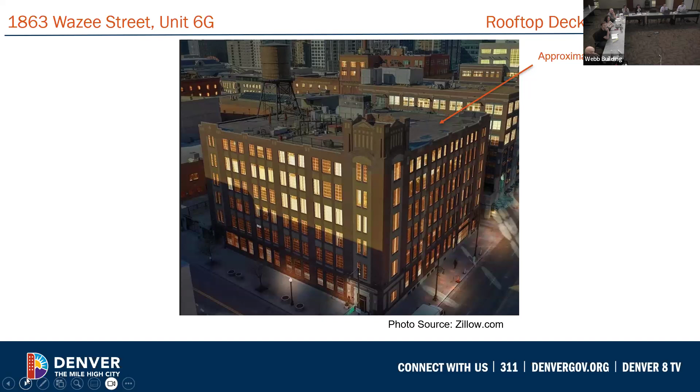Next slide, please. So here's on the left, a floor plan of the unit. And you can see the stair being added, and its location is driven in part by a kitchen island. The image on the right is the roof plan showing that staircase reaching the roof.

The setback from 19th Street is 12 feet 9 inches. There's a guideline that says that the setback should be 15 feet, so they're not quite there. But again, the interior layout of the condominium is driving that location, and the more that they move the bulkhead inboard, the more it bisects the usability of their outdoor space. So there's a couple of reasons they've designed it the way they have.

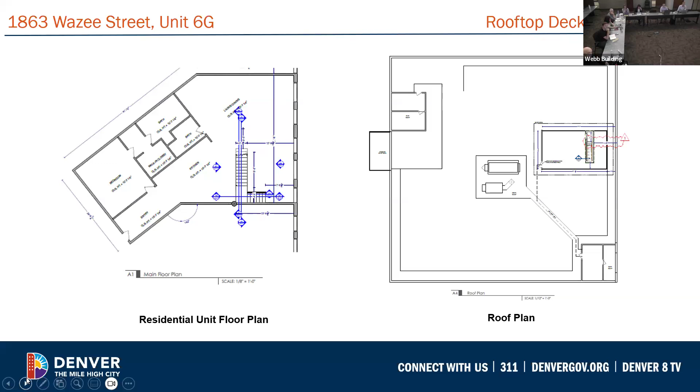Next image, please. Elevations here from 19th Street and the alley. You can see that the bulkhead is designed to run with the stair, so it's as limited in height and form as possible. It reaches a maximum height of 8'9½", which again mitigates staff's concern that they're not meeting that full 15-foot setback that's suggested in the guidelines.

As you look from the alley, it's only as wide, of course, as required for the stair function. There are a couple of other elements that are part of the project.

There's going to be composite decking set on the roof surface just to create a usable space for them. A 3'6" tall railing will surround 3 sides of the outdoor space. You can see in the alley elevation, there's a screen wall to give some privacy to the unit. It's on the sort of inboard southwestern side of the space. It is to be clad in cedar, and it has a full light door that would allow the users to walk onto the rest of the roof surface.

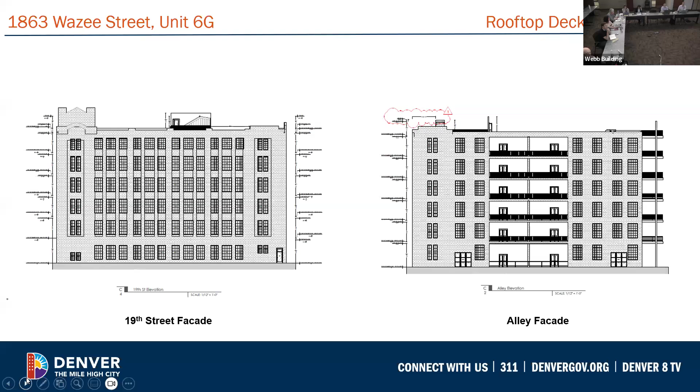Next slide, please. The bulkhead is to have a standing seam metal roof and either metal siding or composite siding, to be determined. The only fenestration, which you see in this south elevation, faces inboard on the deck, so it won't have a glow that will affect or be visible to other people on the street or adjacent properties. There's no outdoor lighting indicated on the plan that may be required by code, and if so, we'll need to see that light fixture and it will have to be downward oriented to meet lighting code.

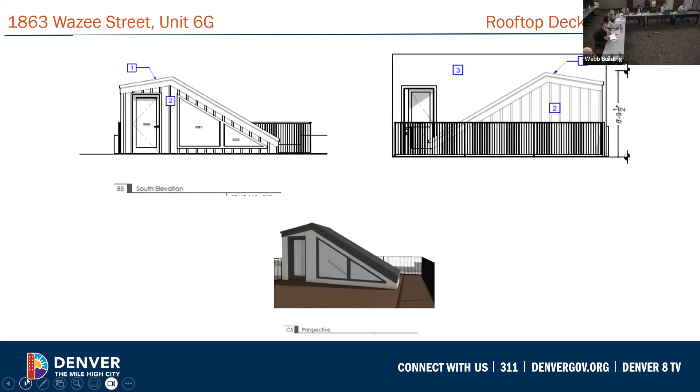Next slide, please. We are recommending approval as designed with one condition because there's some discussion happening still about the exact material selection. We want to make sure that everything has a matte finish. And that's it. Great. Thank you, Amy.

Do any commissioners have any questions for staff this morning?

I have a question. When we speak about a matte finish, does that include, would a galvanized metal be matte? And does that also apply to the standing seam roof? The way it's worded in the condition is a matte, non-reflective finish. I don't think staff would perceive a galvanized finish as meeting that criteria. And if you think we need to add some more clarification, we can. I don't think that's even being contemplated. There is a painted metal standing seam material indicated in the packet. I believe that's the direction that they're going. They haven't said anything to suggest they have other ideas for the materiality.

Any further questions for staff? Okay, not seeing any. Thank you, Amy.

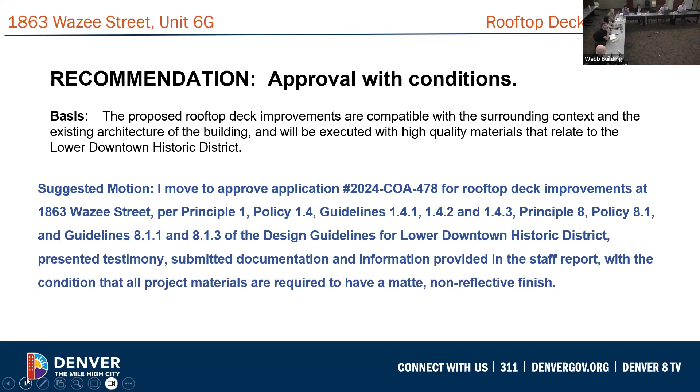Thank you. And we do have the applicants here and their designer, I believe, is on the Zoom call, Kyle. Wonderful. So open it up to the applicant presentation. As soon as we get it started here, if you could just begin with your name and address for the record, please. And then Kyle Taylor's moving you to a panelist, so you'll be able to speak shortly.

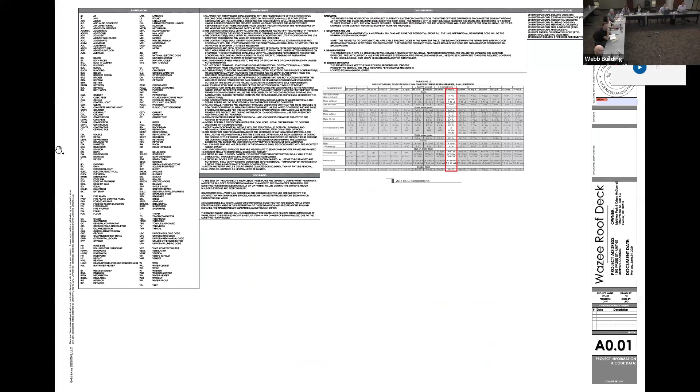Good morning, I'm Chrissy McConnell. Matthew Park. We're the owners of 1863 Wazee 6G. No additional information, other than what Amy had presented, but would love to understand if you have any additional questions. The only other thing was, there are two roof decks that currently exist there. One has a structure with an exit very similar to ours, that is not necessarily 15 feet from the street as well, so just stating that for precedent. Thank you.

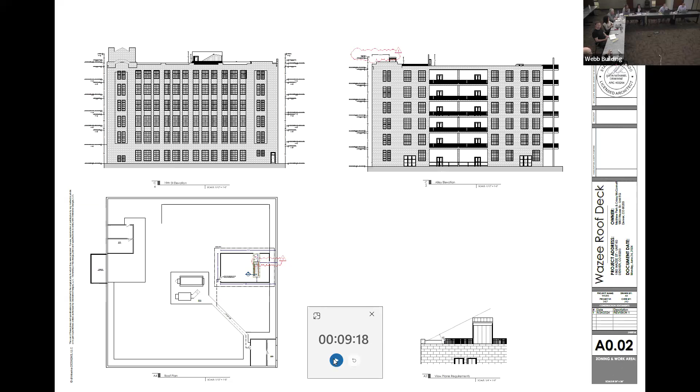Anything else, or open it up for questions? Unless Kyle has anything he wants to add. No, I think you guys and Amy hit all the key topics. Great, do we have any questions for the applicant this morning? Okay, wonderful, I don't see anyone else here in person.

Is there anyone joining virtually who would like, from the public, who would like to speak on this project? If you are, please raise your hand on the Zoom so that Taylor can shift you over. No? Okay, we're not seeing any staff follow-up clarification. Wonderful, we'll open it up to deliberations.

What does everybody think? I think it looks great. I have to admit that I don't know that I feel the condition is necessary. I think it has a contemporary form and distinguishes itself from the building, and if some of that distinguishment is color as well, I just kind of don't know that I feel like that's something we need to require.

I don't know that the condition is weighing in on color. I think it's just, we do have the guideline that things aren't overly reflective and shiny, and I think that's what that condition is getting at. I'm not reading anything in that condition referencing color. And I would agree with that. I think it's just making sure that materials aren't glaring.